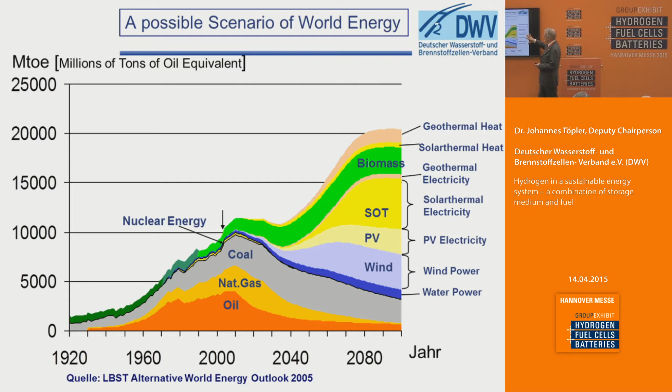And this is a consideration of the World Energy Outlook in 2005, and that is what is to be expected. And if I present you this figure in another color, you will see here the conventional energies in blue, the renewable ones in green, and a special situation is biomass in brown. And we see that the basic energy systems today can store energy. The energy is stored in coal, natural gas and oil. That means we have a fuel-based system. And if we want to make electricity, we have to convert it with a low efficiency in a power station.

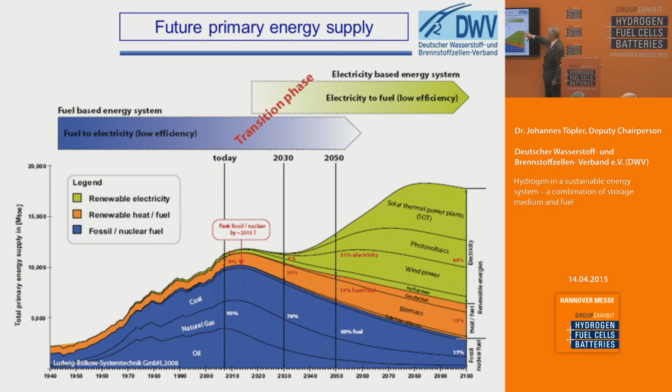And in future, when we will have solar thermal energy, photovoltaics, wind power, we will start with a technical energy system by electricity. The first energy by converting natural energy for technical application is electricity. That means in future we will have electricity and we have to convert it for other applications to fuel. That's a strategic change in energy application. And now these energies are not constantly available and not on demand. These energies are fluctuating, and what this means is shown here in this figure.

That's the wind power in 10 days of March in 2007 in the E.ON electrical grid. And you see here the fluctuations. And in Germany we have the legal situation that we have to increase wind power by a factor of 3. This is to be expected. That means with the same meteorological conditions, the same curve will be in 2020, this blue curve.

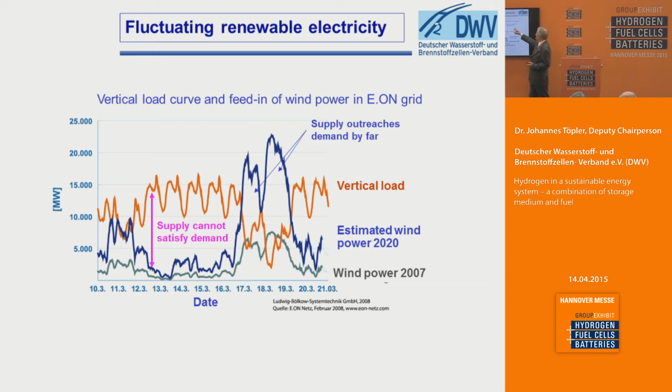And now you see here, for example, that we have in this part a supply which cannot satisfy the demand. The supply is here, the demand is here. And we have other days where the supply outreaches the demand by far. And what we have to do is to store it so that in times of low supply we have enough energy. And this storage system can be shown like here.

It's one model that wind energy is converted to electricity and used in households and industry. And the surplus in those days, when we have more energy than can be used, we can make hydrogen by electrolysis. We can use this in fuel stations, hydrogen as fuel for mobility. We can store it in big caverns. We can use hydrogen from these caverns for households, for house energy supply, and afterwards we can reuse it for electricity by turbines, fuel cells and via the electric grid as electricity again in industry and households.

With this storage system, we can make the energy supply constant or on demand. For the case of hydrogen use in households, there is another additional way with methanization, the so-called power to gas via methanization. This can be done in some time in between when we want to use the natural gas network.

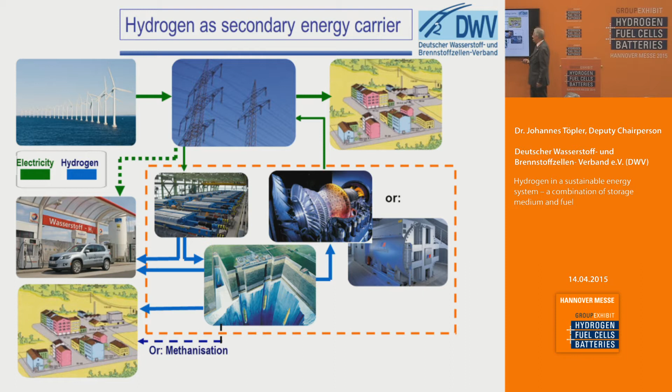There are some other possibilities to store energy, and this is shown here. For example, pumping storage systems. The energy is mainly limited up to 5 gigawatt hours. For example, for the biggest system in Germany, in Goldisthal, it's 5 gigawatt hours. That means round about 1 gigawatt power for around about 5 hours. Or another possibility is advanced compressed air energy storage up to round about 100 bar with an energy capacity of 23 gigawatt hours. This is this blue square.

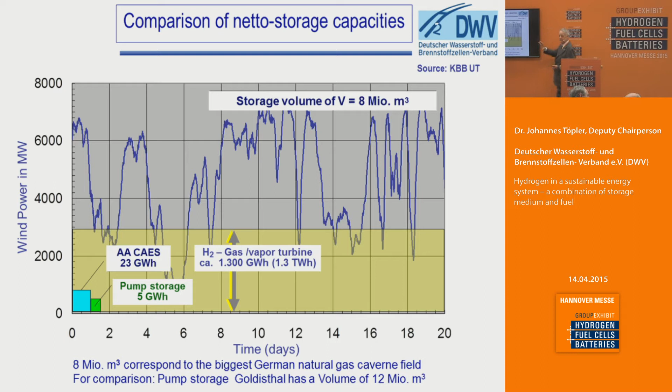And if we want to use hydrogen with a very, very high energy density measured by volume, we can store round about 1.3 terawatt hours with turbines up to 3 gigawatt. That means hydrogen as a chemical energy carrier has a very, very high capacity to store big amounts of energy for a long time. And this is shown once more here in this figure.

Here you see the hydrogen content per volume, the density per volume, with 100%, round about 280 kilowatt hours per cubic meter. If you reduce this by the efficiency of electrolysis and fuel cell, you have still round about 170 kilowatt hours per cubic meter.

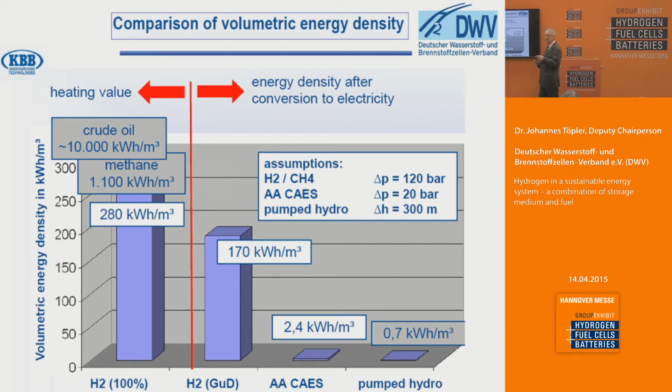In this relation, the adiabatic compressed air energy system is around 2.4, and the pumped hydro system around 0.7 kilowatt hours per cubic meter. That means the hydrogen density is very, very high, and that's a physical reason, because big amounts of energy can be bound or stored in big caverns with hydrogen by chemical reasons.

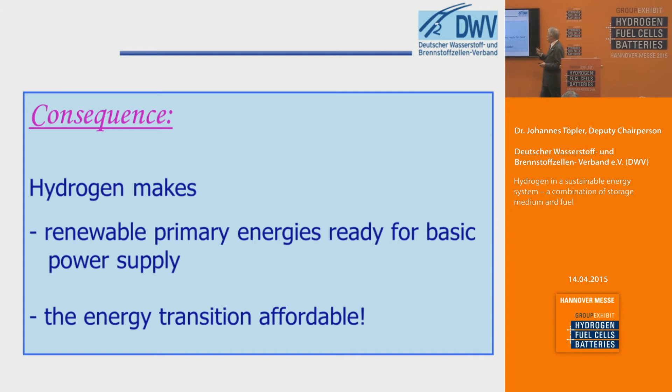The consequence, in summary: hydrogen makes renewable primary energies ready for basic supply. It's very, very important to have a guarantee of basic supply for the energy distribution. And by this way, the energy transition is affordable, because the stored hydrogen can additionally be used for a lot of applications as fuel. And by this double or triple use, the whole system becomes affordable.

And now let me say some words about hydrogen as fuel. For example, in motor cars, this is done especially in fuel cells, not in combustion engines, due to the efficiency. A fuel cell has an efficiency of around 52% for traffic application in the normalized cycles, and for conventional fuels it is around 22% for the same cycle. This is a fuel cell system: the stack, the auxiliary units, for example the pumps and compressors.

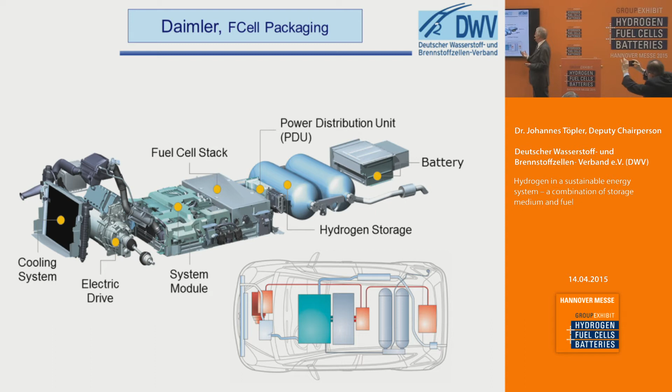This is the cooling system, and this is the propulsion engine, an electric engine. And here you see the hydrogen storage system, a gaseous storage system with 700 bar. And here is an additional battery. This battery is used for the reuse of braking energy and for other purposes. I will show it later.

And here is one possible design of a car. It's a Daimler B-Class. Here is the fuel cell system in the double bottom, and here are the auxiliary units and the drive, and at the back the battery. And a car like this was tested by a trip around the world in 125 days with around 30,000 kilometers.

And Daimler has announced serial production in 2017. And you can see here today at this fair the first serial motor car from Toyota, and you can drive with it. The serial production of fuel cell cars has begun.

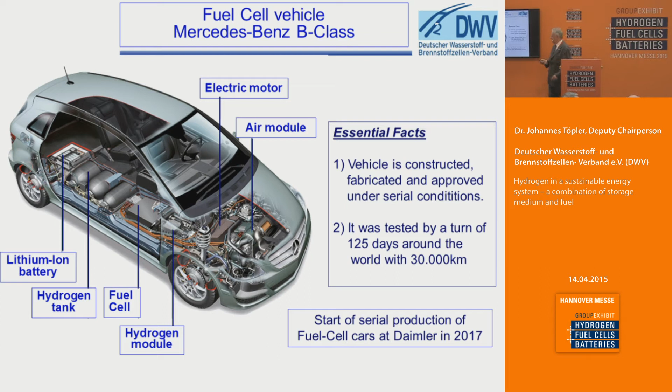And now let me say some words with respect to electric propulsion. We can do it in two ways, by batteries alone or in a battery fuel cell storage system. And let me tell you the difference. The efficiency of batteries is very high, higher than fuel cells. But the amount of stored energy is limited, and this has a physical reason.

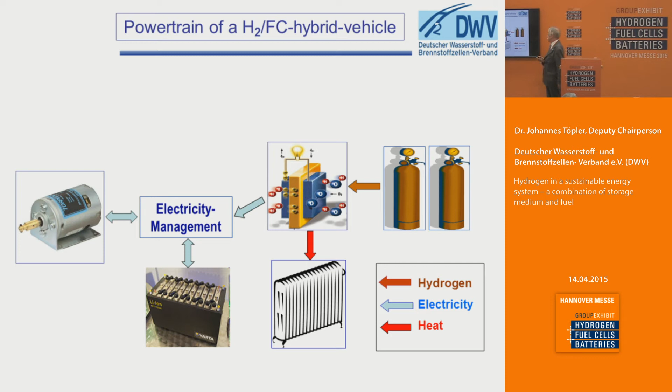Let me tell something about the advantages for different applications. There was a very big study, the so-called coalition study, with a motor car manufacturer, with gasoline fueling station responsible people, and they have calculated where are the advantages for which ranges of cars.

And you see here the battery vehicles, plug-in vehicles have mainly advantages in compact class vehicles and low ranges. In this case, when you drive only 100 kilometers between two fillings, then cars in this range have advantages. If you want to drive long ranges or you have bigger cars, this area of car application is very comfortable with fuel cell hybridized cars.

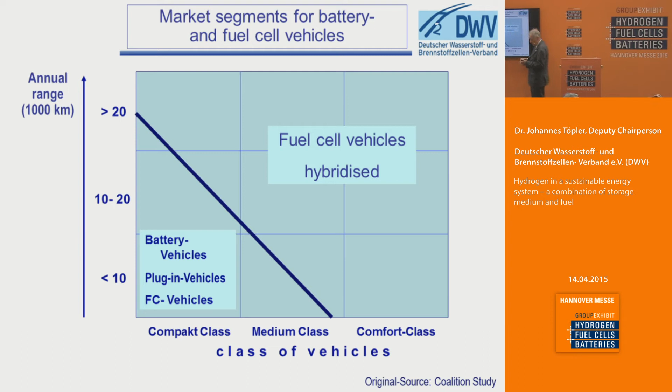This figure doesn't say anything about the number of cars. If a lot of people decide to use the cars only for small ranges, and small cars are fine for them, then here in this triangle can be a lot of cars. But these applications show where are the advantages by high efficiencies from batteries or huge storage possibilities for long-range cars.

And now sometimes there are some discussions about biomass. If you look, for example, at biodiesel from rapeseed methyl ester, you need a lot of area of hectares for growing these materials. And by this way, you can drive about 3 passenger cars from the result of 1 hectare. And if you make, for example, compressed hydrogen from short rotation forestry, you can drive about 9 cars from 1 hectare of biomass.

And if you take compressed hydrogen from photovoltaics, you have 1 hectare photovoltaics, you can drive about 70 cars, and in the case of wind energy, about 18. I will say by this that you need for biomass sometimes a lot of area. And if this area is agricultural, then you have a competition of food or fuel, and you have to be very careful with this.

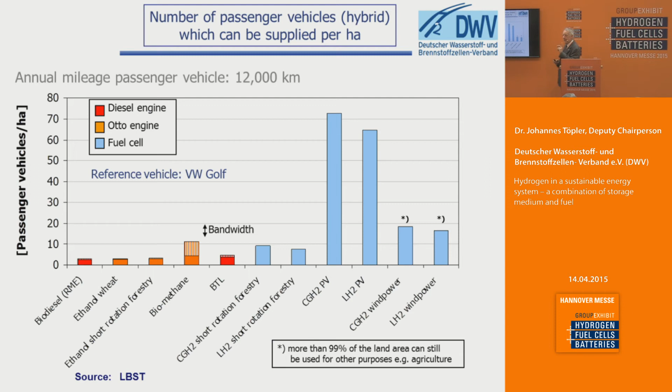But on the other hand, we will have biomass from waste biomass. And then it is a question, what can we do with it? Waste biomass is always diesel or ethanol, and it has to be converted in an internal combustion engine. And the efficiency has always this shape. In the case of diesel at high loads, it's a little bit higher. It's a physical question of the so-called Carnot process. It's a thermodynamical process, and always the efficiency has this shape.

In the case of a fuel cell system, you have an efficiency characteristic curve like this, and a passenger car is generally operated at about 15% of maximum load. That means in the case of a passenger car and an urban bus, you always have a stop-and-go operation at low load, and here the efficiency is much higher than a conventional internal combustion engine.

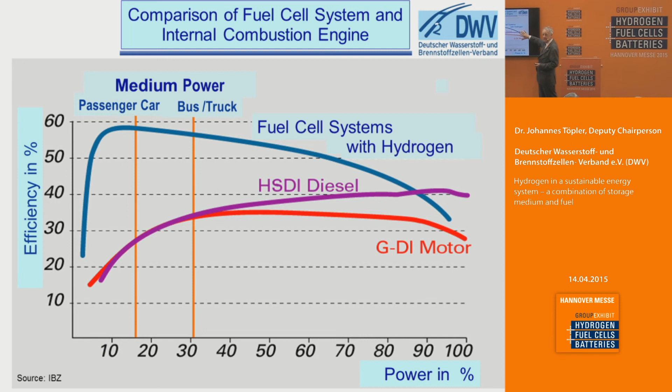That means if you have biomass and you use it in internal combustion engines, the best way is to do it with vehicles which are operated a lot of time at high load. That means airplanes, ships, or big trucks at long ranges. In this case, biomass has high efficiency, which can be compared, for example, with fuel cells.

And another remark is, we very often have the discussion that if we have a surplus of wind energy, there is no cost. If this doesn't cost anything, then the efficiency doesn't matter so much. And here you have the efficiency steps of a surplus of energy. The first step is to make hydrogen from electricity via electrolysis with an efficiency loss of 30%. Then in both cases using hydrogen or methanization. That's a path of power to gas including methanization.

Then you have in both cases efficiency loss of compression and so on for hydrogen, and for methanization it's quite similar. And at the end we have the high efficiency of the fuel cell and the very low efficiency for synthetic natural gas in a diesel or an Otto engine. And here are the efficiencies of the whole chain, from about 22 in this case to 12 in this case and 29 in the case of wind. And the argument is, if this costs nothing, it doesn't matter what the efficiency is.

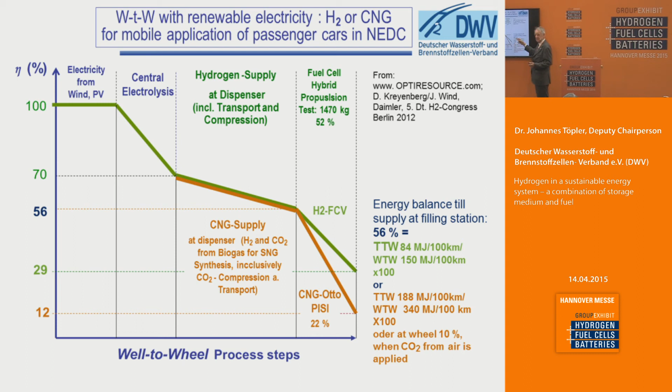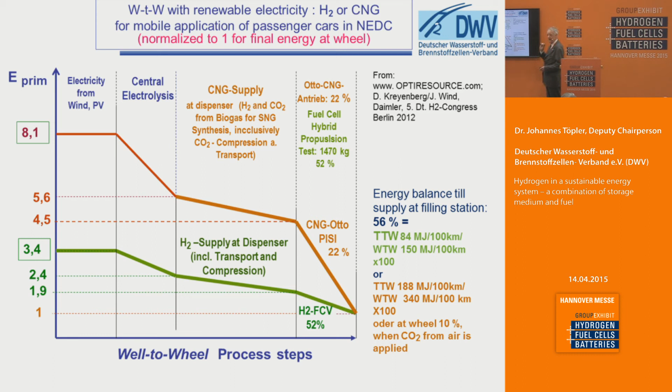But if you look a little bit more carefully and you say, the important thing is the energy which I need at the end, and you recalculate, this is normalized to 1, back to the early beginning of the energy conversion, you need systems which are more than a factor of 2 bigger, and this costs a lot of invested energy. And therefore, it's very, very important how efficient the whole systems are. And the efficiency of the hydrogen chain is always very high due to the high efficiency of the fuel cell. And that's a very important argument.

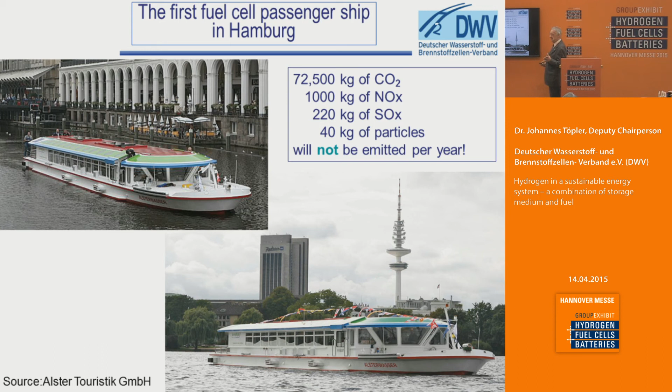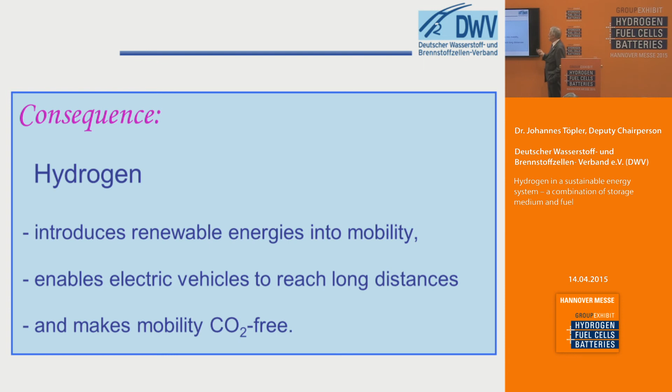The consequence is that hydrogen introduces renewable energies into mobility. Hydrogen enables electric vehicles to reach long distances, and hydrogen makes mobility carbon dioxide free. Those are the main sentences.